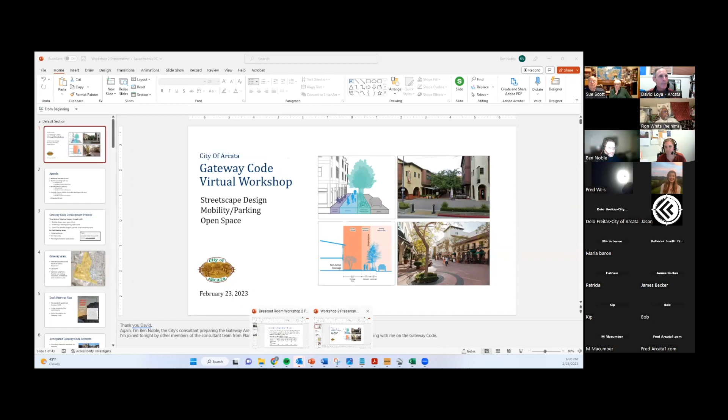Okay, so we can see the title slide in all its glory. Absolutely. All right. Okay. Thank you, David, for that introduction.

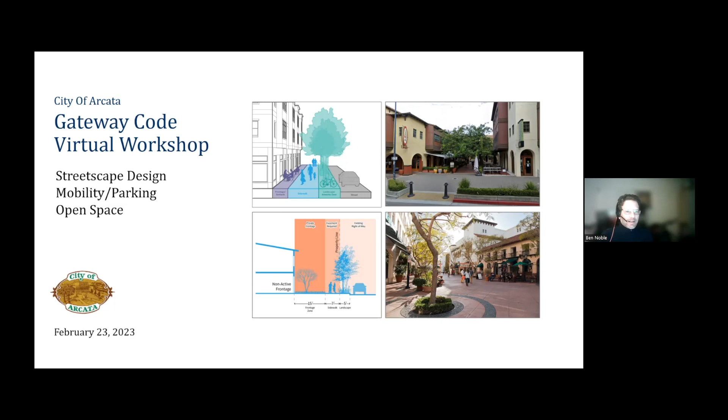Again, my name is Ben Noble. I'm part of the consultant team working on the Gateway Area Plan and the Gateway Code. I'm happy to be here tonight for the second virtual workshop on the Gateway Code, which we're going to be talking about streetscape design, mobility and parking, and open space.

If you were at the first virtual workshop, this is a similar format, but not 100% identical. We're going to begin with an overview of the workshop and where we are in the Gateway Code development process. And then we're going to focus on three topics, the three topics I mentioned before.

For each of those topics, I'm going to give about a 5 to 10 minute presentation. We're going to then break up into breakout rooms for some discussion of that material, for about 20 minutes, for the first topic, which is streetscape design. Then we'll come back with the full group for mobility; I'll give a presentation, and then we'll divide again into breakout rooms. For the last topic, privately owned, publicly accessible open space, we'll come back together again as a group and then break out again. So there'll be 3 separate breakout room discussion sessions, and then we'll conclude with a wrap up. We'll be finished no later than 8 o'clock tonight.

Okay, so this virtual workshop tonight is part of a larger Gateway Code development process where we're having a series of meetings on development code topics. The first meeting series we finished now, and that was primarily on building design.

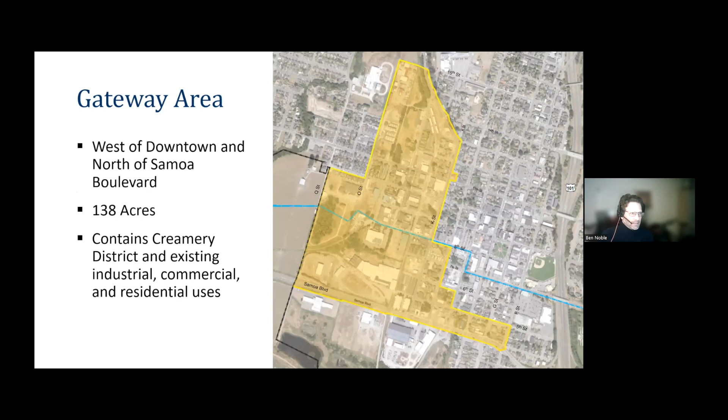Just a reminder, we're looking at the Gateway area, which is the area subject to the Gateway Area Plan. It's west of downtown and north of Samoa Boulevard, 138 acres, and it's the area that contains the Creamery District, as well as existing industrial, commercial, and residential uses.

There is a draft gateway plan that has been prepared. A revised draft was published in October of 2022, and it's currently under review by city commissions. This document is the policy foundation for the work we're doing in the Gateway Code, which is the tool we're going to use primarily to implement this plan.

As mentioned at prior events, the Gateway Code is going to contain form and character standards for different sub-areas within the Gateway area, as well as rules for allowed uses, standards that apply district area-wide, such as parking and historic resources. It's going to include standards for streetscape and public open spaces for the public realm. There'll be a section on the community benefits program, which allows increased height for projects that provide amenities that benefit the public, and then also permit requirements, including rules for projects that may be allowed through a streamlined ministerial process.

So tonight we're looking at a subset of those topics, really focusing on streetscape design, mobility and parking standards, as well as privately owned, publicly accessible open space. At the first workshop, we were very focused on the design of buildings on private property. Tonight, we're looking more at the public realm and what the standards are that shape that space within the Gateway area.

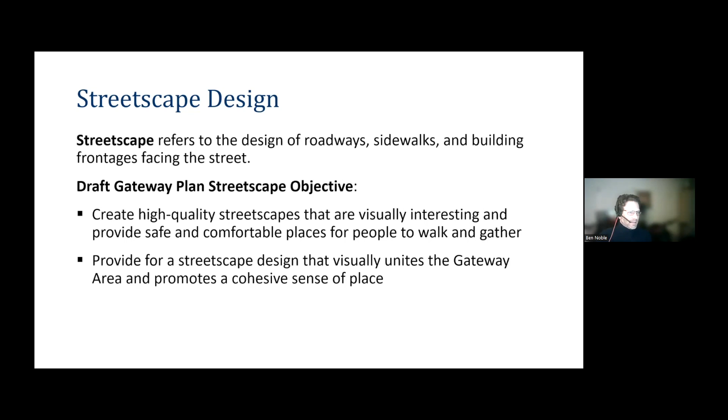When we talk about the pedestrian realm, we think about 3 different zones within that space. Closest to the curb, there's the landscape amenity zone, which includes things like street trees, lighting, bike racks, benches, landscaping and amenities. Then there's the sidewalk or the pedestrian clear zone, which is the space where people are walking along the street within the pedestrian realm.

And then there's the frontage setback zone. Adjacent to an active commercial use like a storefront, this zone might be used for outdoor dining, cafe seating, maybe some planters, maybe some benches. So we're thinking about the design and configuration of these 3 different zones within the pedestrian realm, which is really what we're focusing on tonight.

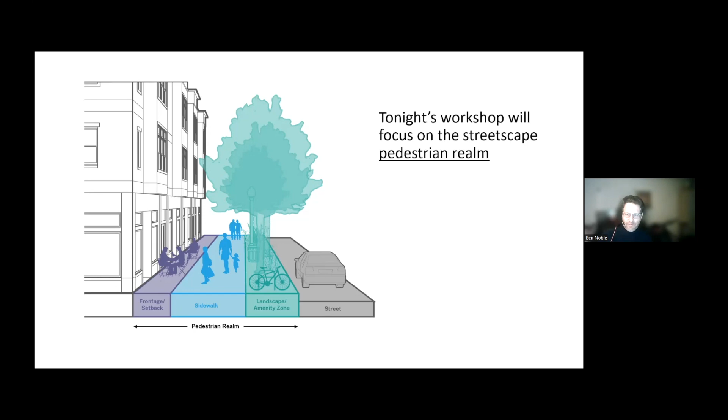So where we are with streetscape standards for the Gateway Code is we have an approach that we're planning to take that we want to share with you tonight before we embark on more specific design work to develop more detailed standards that we plan to share with the Planning Commission and with you and the general public in advance of the Planning Commission's work session. We want to share this approach with you, see what thoughts you have, and that will help us as we further develop and refine this material.

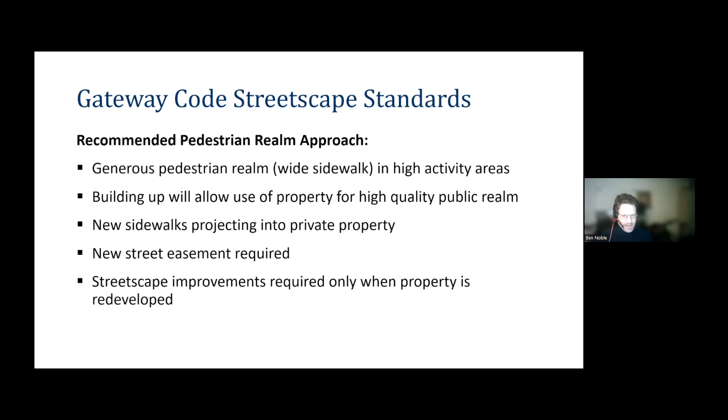Also as part of this approach, we're anticipating that the Gateway Code will define street types or street typologies, and each of these street types will have unique streetscape standards. The code will assign a specific street type to all existing and planned new streets. So this is what we're envisioning with the streetscape standards within the Gateway Code. And we wanted to share two examples of what this might look like with you to help illustrate it and get some feedback from you on this concept.

So we have one street type that we're sharing with you tonight that we're calling the town center street. This would be a street type intended for the highest activity areas within the Gateway area plan, places like 8th and 9th Street, really the core of the area. There's another street type that we put together that's intended for less active areas, places such as 11th and 12th Street, more around the periphery of the Gateway plan area.

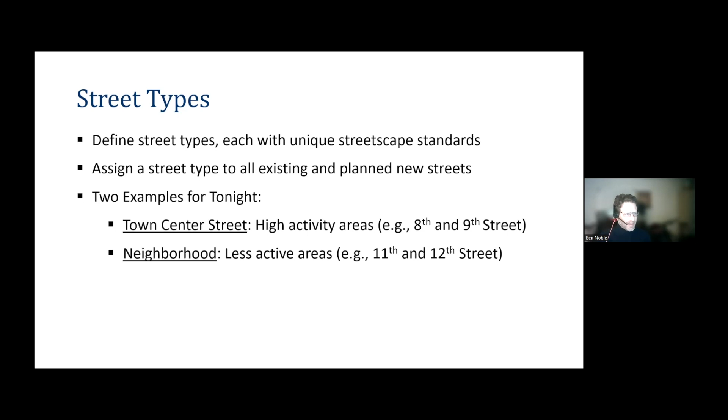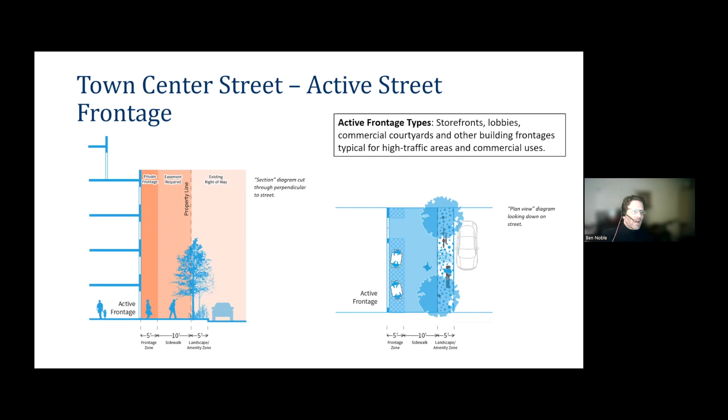As part of our further design work, after we've received comments tonight and through the online survey, we're going to be looking at this on a block-by-block basis, and specific parcels as well, to understand the locations where this would be most appropriate and where it's feasible, given unique site constraints and existing conditions.

Another part of this concept is that for non-active street frontages—building types such as stoops and porches accessing residential units—the frontage zone or setback would be a bit more than for active frontage types, to provide more privacy for those ground floor residential or office uses and provide more of a transition from the public realm and sidewalk to the private property. So different frontage zone standards for non-active frontages compared to active frontages is part of the concept.

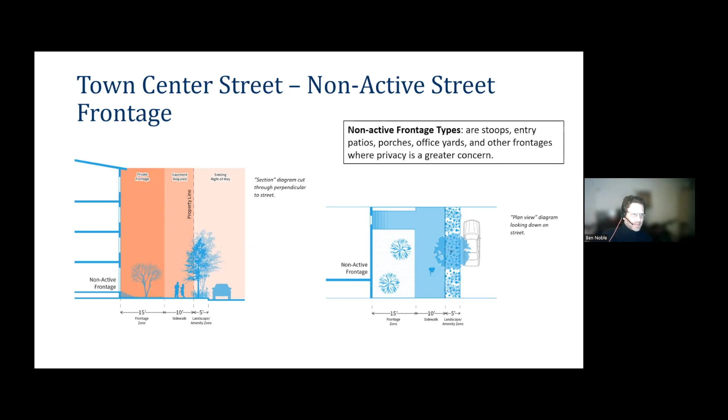I was just talking about pedestrian realm dimension standards for what we're calling a town center frontage. We're also envisioning other street types for areas where we expect less pedestrian activity. In those cases, the dimensions may be more constrained, with narrower sidewalks and maybe a narrower landscape amenity zone. Here's an example of what we're calling a neighborhood street—you can see the section diagram on the left showing a 7-foot sidewalk as opposed to a 10-foot sidewalk in the town center street type.

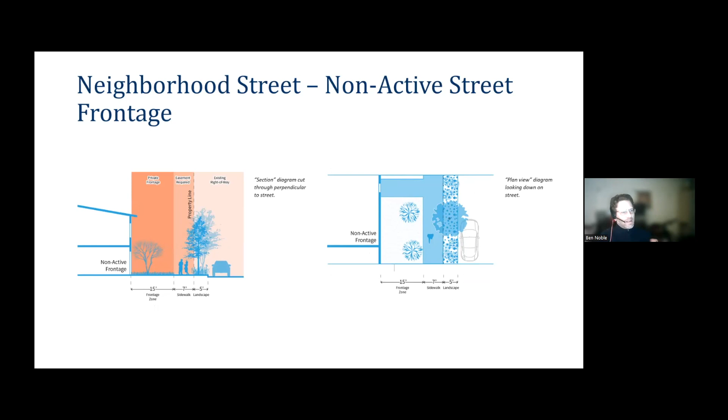Again, if there is a non-active frontage with, say, a ground floor residential use with a porch or patio, there would be an increased setback, an increased frontage zone, to provide more privacy for those ground floor uses, as well as more of a transition from the public to the private realm. That's part of the concept as well.

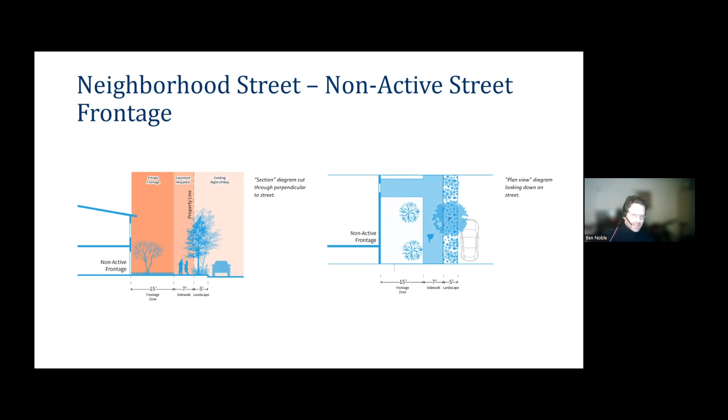So that's an overview of our recommended approach for the streetscape design. As I mentioned previously, we're at a point where we wanted to share some of these concepts with you at this virtual workshop before we proceed with more detailed design work to take to the Planning Commission. We're asking for some of your feedback and reactions tonight. There will also be an online survey where you can take a little more time to look at some of these materials and provide additional comments.

But what we're looking for tonight are reactions to questions such as these: What's your general reaction to the material, the ideas I just presented? Do you have any comments about the specific standards of either of these two street typologies that I shared?

For example, for the town center street, there's a 10-foot sidewalk and a 5-foot amenity zone. Do you have any specific reactions to that? Any reactions to the idea of varied frontage zones or setbacks for active versus non-active use, or anything else you'd like to share related to the streetscape design, particularly the pedestrian realm?

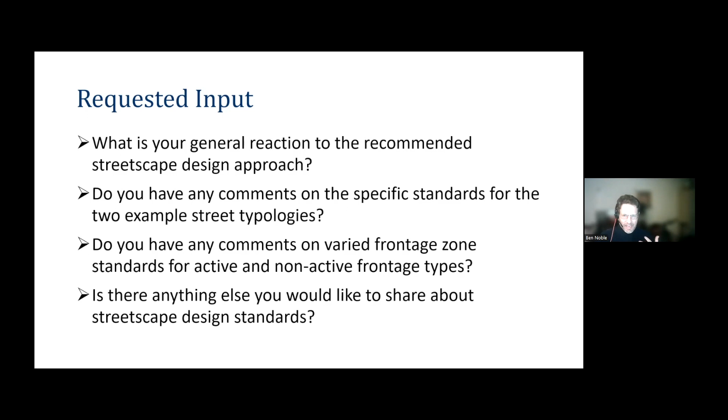As I said previously, you'll have an opportunity to ask questions and provide comments in your breakout rooms, and that's what we'll do now. You're going to be randomly assigned to a room. In the room there'll be a facilitator who will share materials, manage discussion, and be there to answer questions. We'll have about 20 minutes for that discussion.

Someone tried to speak while muted. I guess that was going to be me.

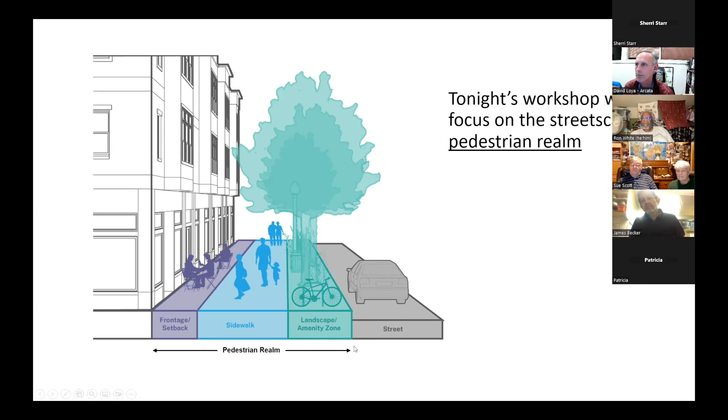Thank you for that. Sherri? Oh, I'll raise my hand, sorry, I had it up. Just to clarify, is this going into a bucket of optional amenities that a developer may elect to give the city, or is it going to be a requirement?

Yeah, that's a great question. For those new to the conversation, the way the code is envisioned to be structured at this point is that there will be some code standards that are required that buildings must conform to. If they don't, they would have to go through a more lengthy planning process to ask for exceptions to those codes. In addition, there's a group of community benefits that are optional, and projects, depending on how dense they are, would have to select from amongst these optional categories. They will all give something, but what they give is optional.

So Sherri, your question is whether what we're discussing tonight with streetscape is optional or not, and the answer is no. These will be standards that new developments would need to conform to. There are a couple of different ways they could be financed, but new development would come into compliance with these new standards.

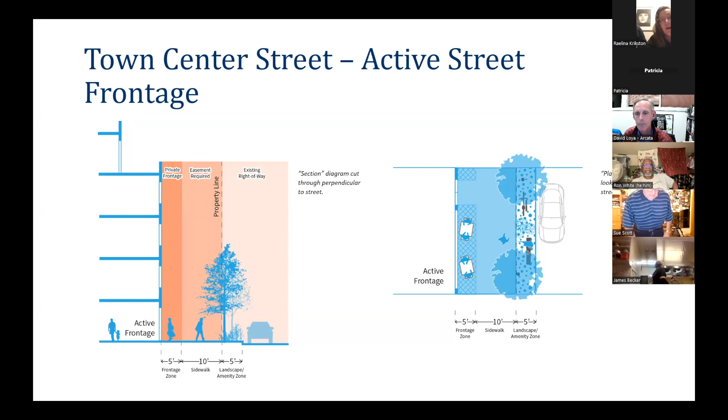Thank you. Raelina? Thanks. I'm curious, both the residential and commercial setbacks look really good. I'm curious to know, within a potential larger development, for instance, are there stipulations for how, if there are multiple buildings in a residential development, those kinds of setbacks work? Sort of an in-between from private use and public use, for instance, apartment buildings.

Let me make sure I understand the question correctly. So in different development types, could these standards be flexible based on the type of development it is? More so applying the same standards, the same residential standards for instance, whatever is appropriate, but applying those standards between buildings within the same development. I understand what you're saying, setbacks interior to the development. Exactly. At this point, we're not contemplating that.

I would say that tonight's focus is really on the streetscape, and so the internal design is largely left to those designers to build. We may ultimately have some standards in the building designs that have requirements for access to glazing, for example, access to windows, but right now there's no specific design standard for that.

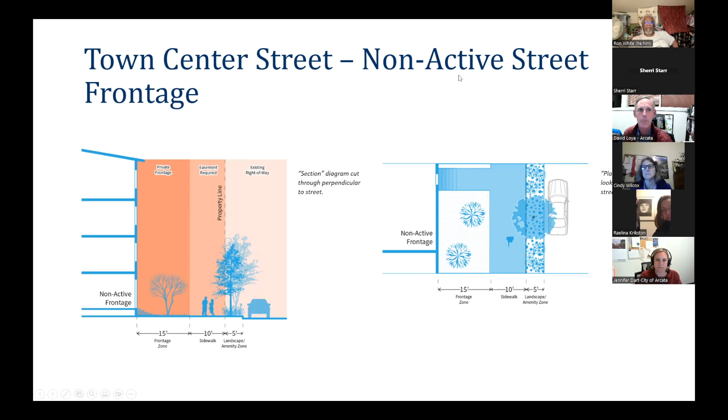I just wanted to say I really like the design, especially the frontage right in front of apartments that have the ability to have shrubs and things like that. So I'm all for it.

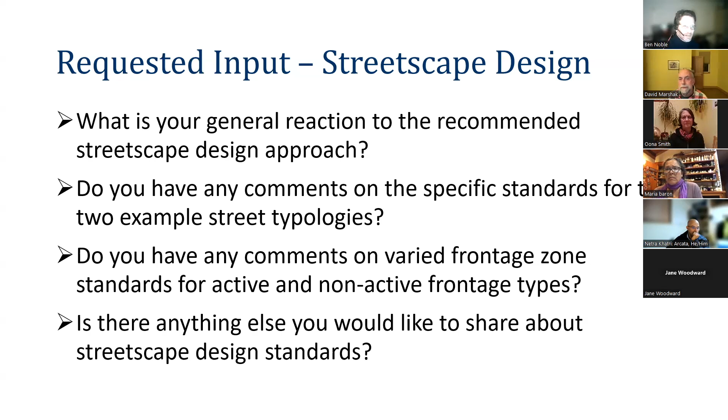Thank you. So the comment I have—obviously that street design is attractive. I've been to the place you showed in Santa Cruz, and clearly it invites a whole range of uses that the sidewalk alone doesn't invite or allow. It would be nice to have many more places outdoors in Arcata that would invite outdoor uses for all kinds of different stores and even people's homes. The question though—the devil's in the details. You're asking people for 15 feet, basically, in either example, and the question is, what do they get for it?

It's really hard to evaluate the goodies without knowing the whole system of what it is that the city will give them, because 15 feet is a lot. It's a significant portion of their lot. So I think the design would be great, but if people were getting something that would counteract the value of the design, that's why it's hard to say, if we're just looking at whether the design is attractive.

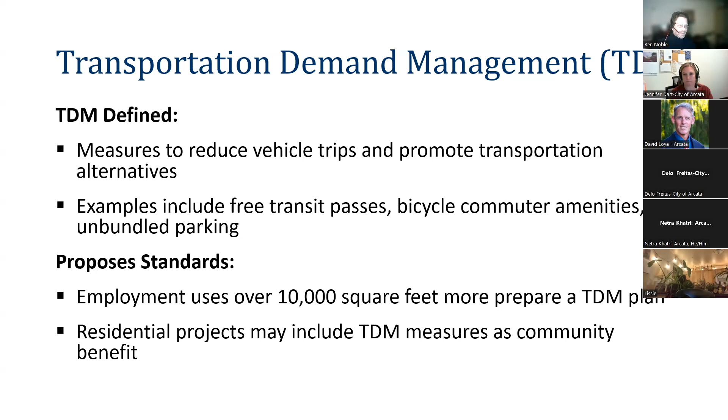And for a residential project, TDM measures could be included as a community benefit. For example, a residential project could offer free transit passes, which would qualify as a community benefit allowing for additional height under the community benefit program, along with other benefits the project is providing. So a specific type of TDM measure, as I mentioned, is unbundled parking.

Unbundled parking means separating the cost of parking from the rent, lease, or sale of housing or commercial space by creating a separate parking charge, as I mentioned before. What we are proposing for the Gateway area is to require any provided on-site parking serving commercial tenants or residences to be unbundled from the cost of lease space, rent, or purchase.

Remember, we're not requiring any on-site parking, but if a developer chose to provide on-site parking, the cost of that parking would have to be unbundled from the cost of the rental agreement or the purchase price.

We're also proposing standards for carpools and car sharing. If there's a large employment use established within the Gateway area with more than 40,000 square feet, they would need to provide at least one carpool van pool space.

If there's a residential project of 50 units or more, they would need to provide at least one car share space if there's a car share service operating in Arcata. Similarly, a large employment use would also need to provide at least one car share space if there's a car share service provider operating in Arcata.

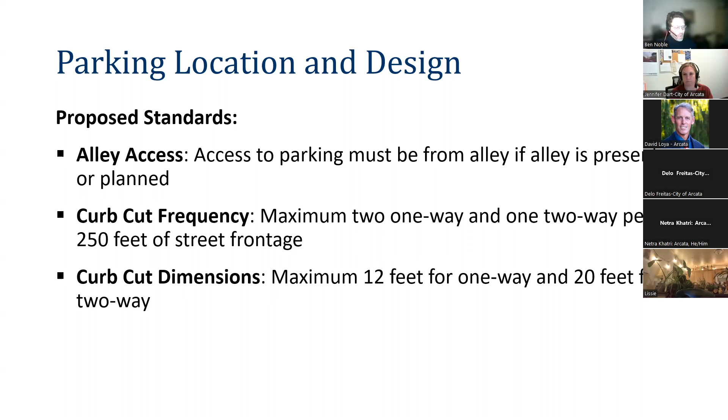Ideally, if there's on-site parking as well as service access to a use, that would be from an alley. We understand there's not a lot of existing alleys in the Gateway area, but we may plan for more alleys. If there's an existing alley or one that's planned, access to the parking would have to be from that alley. There are also rules about limiting the frequency of curb cuts, as well as minimizing their width, all to create as safe and welcoming an environment for pedestrians as possible.

A very important part of the parking location and design standards has to do with the location of parking on the site. In fact, there's a policy in the Gateway plan specifically about that. What we're proposing in all areas of the Gateway area is that parking would not be permitted between a building and both the front main street and a side street, similar to what is shown in this graphic here.

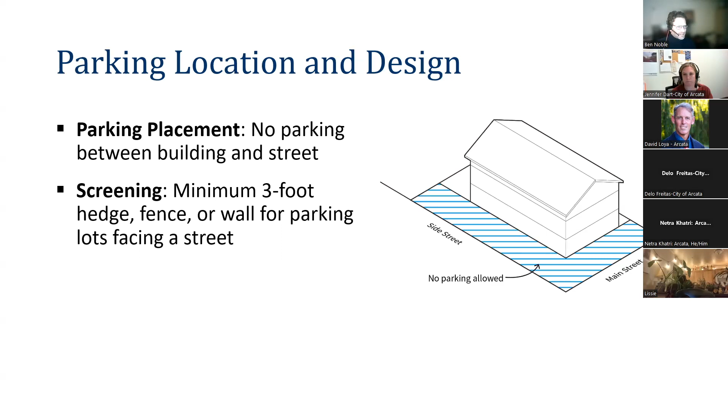For surface parking lots that are visible from a side street — let's say, for example, there's a surface parking lot behind this building in this graphic that you could see from the street — there would need to be screening of at least a 3-foot hedge, fence, or wall for that parking lot that's visible from the street.

The last set of standards we're going to ask you to provide feedback on tonight has to do with bicycle facilities. There will be requirements for bicycle parking for residential uses as well as non-residential uses. These proposed standards are similar to what's required elsewhere in the city right now.

There also would be the opportunity to provide additional bicycle facilities. Let's say, for example, commuter amenities such as a shower and a locker for employees, that would be part of the community benefits program.

So I realize that's a lot of information. You'll have an opportunity to look at this more in your breakout group. We're asking if you have any specific recommended revisions to this material you saw tonight, anything else you want to share about parking and mobility, with the understanding that there'll be an opportunity for you to look at this more and provide further comments as part of the online survey.

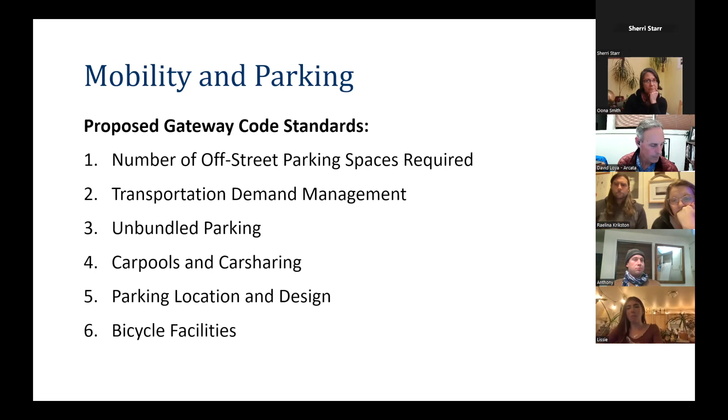For commercial uses, they're allowed to put some parking in here. These parking standards can change based on public input and decision makers' appetite for being aggressive. These standards are very aggressive towards alternative transportation, recognizing that changes will be slow over the next several decades. During that same time frame, we'll be increasing our ability to have more shared parking and alternative transportation scenarios, better busing and that sort of thing. But it is a concern.

I think you also need to provide parking garages somewhere. Yeah, that is on the docket to discuss as well.

Jane said basically what my concerns were also, but I was hoping you could put up the slide again that had an example of a block and where parking would not be allowed. So surface parking spaces may not be located in the area between the front and side property line. That concerns me a little bit because we have so few parking spaces going into the gateway area, that this additional restriction might make things hard — if you have a car, you might end up driving around and round in circles around several blocks looking for a space, and that burns fossil fuels in that search.

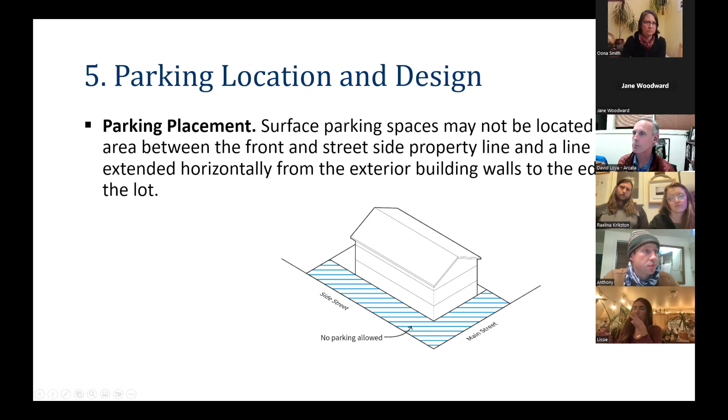We were pretty efficient, I think we've got a little bit more time here — we've got until 7:20, so we've still got quite a bit of time. If folks want to come back and have more comments, you can comment about something you heard from someone else that you'd like to respond to, or we can talk about other details that we have here.

Oona, did you have your hand up again, or did you? I'd not put it down yet. Okay. Jane, did you put your hand up again? I did. All right, you're up.

It's hard to get a good concept of how many square feet a typical building will have in order to identify how many bicycle spaces or parking spaces will be required. And if we don't have alleyways, are you going to create alleyways to access parking? I have a bunch of questions like that. It's very hard to conceptualize what size building corresponds to X number of parking places, depending on what it is. I think it would be very helpful to have sample buildings showing here's where the parking spaces aren't, here's where they would be, here's how you access them, and given X size building with X square footage, here's how many parking spaces you'd end up with. It's very hard to conceptualize.

Right, so I think just from words and square footages — yeah, absolutely, I hear you loud and clear, it is kind of hard to make that jump. I think we'll be able to evaluate some of these details in more specific, site-specific examples. The idea right now is really, from a general sense, are we on the right track trying to require higher proportions of bicycle facilities for these developments. You have to apply a standard, and it may not make sense in all examples.

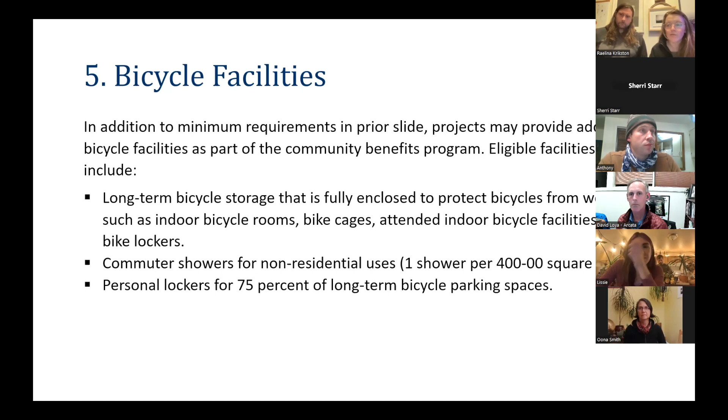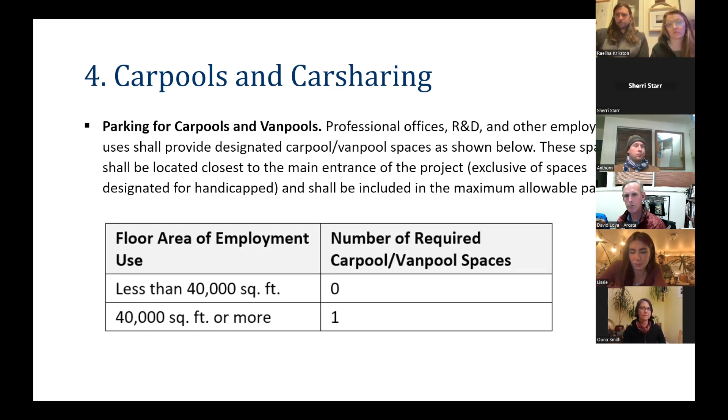Wendy, did you have a comment? Yeah, I did. With regard to EV charging, a lot of folks fought hard to have more EV charging for every unit in multifamily housing. We didn't succeed, but I think it was really important for equity reasons. I think having a charger, at least one per unit, should not be a community benefit — it's a lot more expensive to do the wiring after the fact than to put it in to begin with. So at least there should be an EV-ready space for every parking space — if you're not even having one per unit, every parking space should be EV ready. These buildings are going to be built in the future, they're going to be there for many, many years, and that's going to be needed.

Okay, I was just trying to find the standard you were talking about. I think maybe you're referring to both EV charging and the minimum parking spaces required.

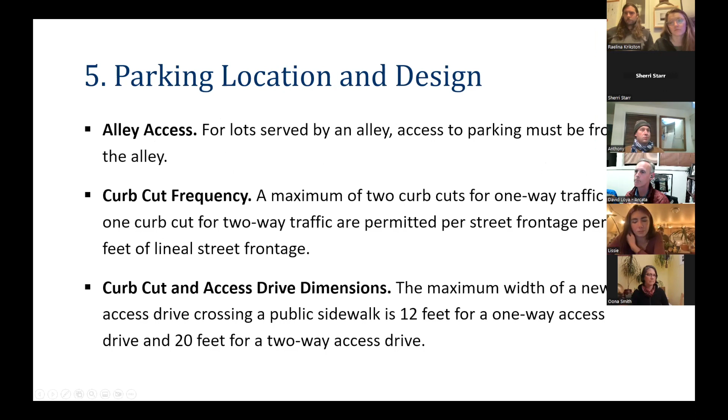No, I was talking about the EV. I was talking about that there needs to be more, that having extra EV charging shouldn't be a community benefit. It needs to be required that every parking space, because eventually they're all going to be EVs. Yeah, I got you. Well said.

I agree with that, by the way. I wonder, hey, too, Raelina?

I was going to chime in about whether or not it's possible to set a maximum on parking permit prices, just so that we don't see something running rampant where you're paying rent and then you're also paying another rent for a parking space.

Yeah, there are a lot of equity issues that we have to think through on those, and ensure that there's not disproportionate impacts on lower income people, people of color, people who don't have the luxury of being able to not rely on a car. So I think those are really good points.

Sherri? I think with the problem of bike theft, that if we really want to encourage people to ride, indoor and secured bike storage needs to be a requirement and not an optional amenity.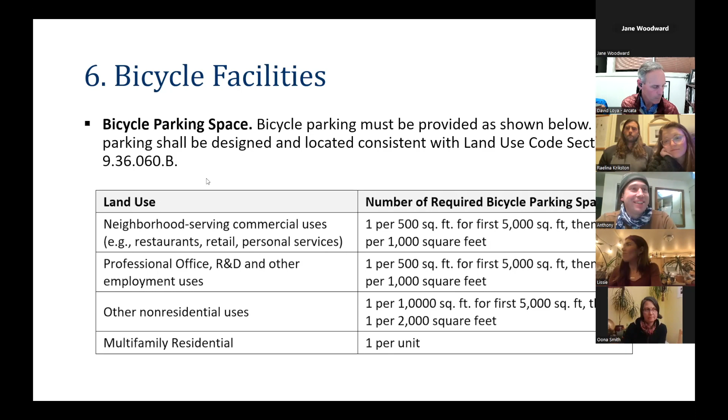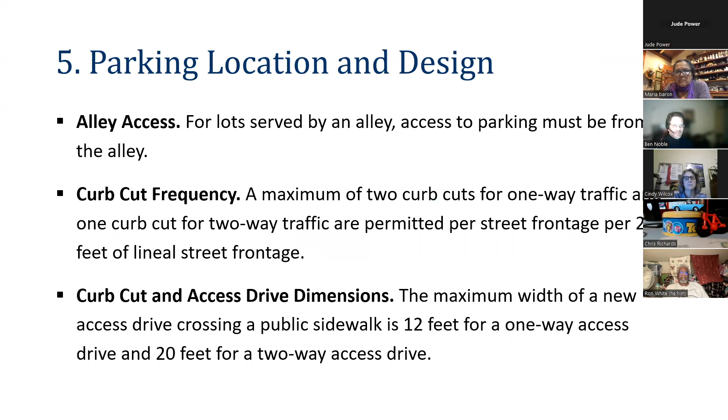Okay, so we have just a couple of minutes. We dwelt on this slide of number of spaces. There are other things, and if you're interested, I encourage you to do the survey. You can look at these standards in more detail. I guess in the couple of minutes we have left, did anybody have anything else they wanted to say about any of these other things?

Bicycle parking location, unbundled parking, anything else that you wanted to comment on?

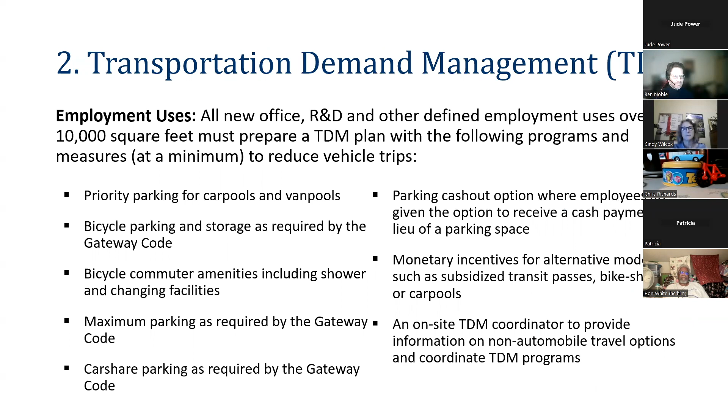I'd like to comment on the bicycle parking. Are they covered, or are they just the rings that you chain up to? Because Humboldt County is a pretty wet place, and it's more encouraging to know if you can put your bike in a place where you're not going to come back and your seat's going to be soaking wet. So are any of them going to be enclosed? And also, a friend of mine who I commuted with would ride his bike and leave it at the transit center, and it got vandalized. So there is an issue of bikes being vandalized, and are there any concept of enclosed bike storage?

Yes, I think the short answer is yes, to a certain degree as a baseline requirement, and then with the option for developers to do even more as part of a community benefit.

I see we're going to lose our breakout room in 60 seconds. Fred, do you have another thing to say? Maybe some parting comments? Just to reiterate that it needs to be enclosed, locking, or lockable bike storage. It just has to be. So, but we'll get to that later. Thanks very much.

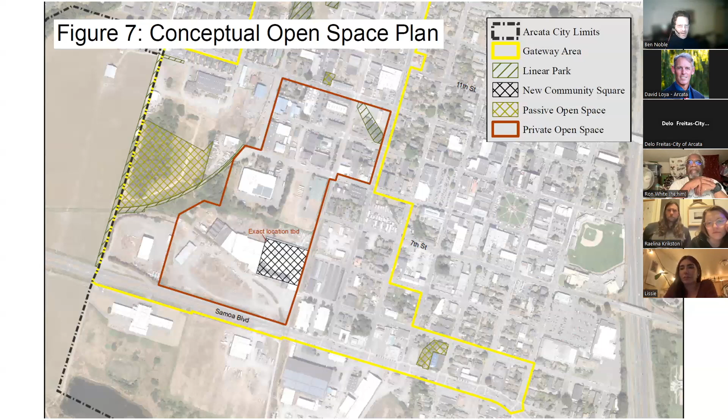There is figure 7 within the Gateway Plan with a map that's a conceptual open space plan. One of the things shown in this conceptual open space plan is an area where the plan envisions new privately owned, publicly accessible open space to be primarily located. It's in the core area, highlighted red in the legend, which says private open space. The Gateway Plan standards refer back to this figure, which is why I'm showing it to you.

What we are thinking with this is that within that Gateway Area Plan figure 7 red area, that central area, a project participating in the community benefits program would have to do one of two things. So if the city is granting additional height, whether 5, 6 stories or more, the project would have to either provide publicly accessible open space at a certain amount, or pay an in-lieu fee that the city would use to create publicly accessible open space in an alternative off-site location by pooling fees collected from other sources.

So if a project elected to provide the publicly accessible open space, the code will say how much it has to provide. What we're thinking is that for a 5-story project, for example, there would be a certain amount, say 7.5% of the site area, which on a 30,000 square foot lot would be a little less than 2,500 square feet, which is a decent sized little public plaza.

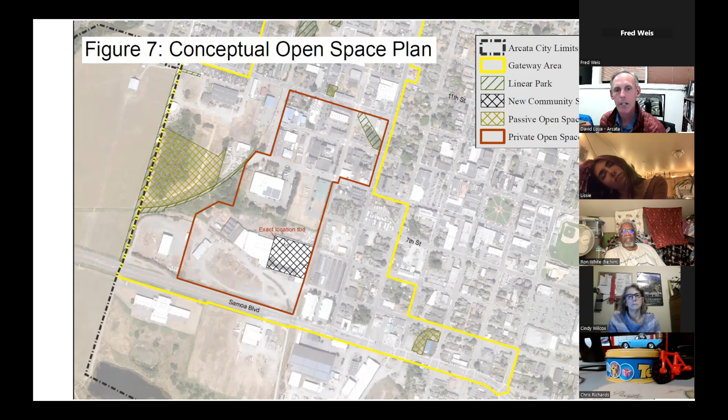All right, you are with me again for this last group to talk about open space, and Zoom is doing very interesting things to me tonight. So thank you for bearing with me with my sharing. I will share this, and then I will open this, and then I will do this. Okay, that's the wrong presentation. Let me try one more thing.

Okay, all right, so I think we have a couple of people with hands raised. I think we'll just jump right in. I think if I'm pronouncing this right, Raelina? Yeah, thanks, Ben. Okay, cool. Well, thanks, there's definitely a lot, but I'll be considerate of other people's time as well.

So specifically with the open space required, I'm wondering if rather than looking at it as a community benefit, there's a stipulation in terms of funding going towards public art within these spaces. So, for instance, 2% of development costs go towards public art within these spaces, regardless of building height. There's some other questions I have, but I'll pass it off for now.